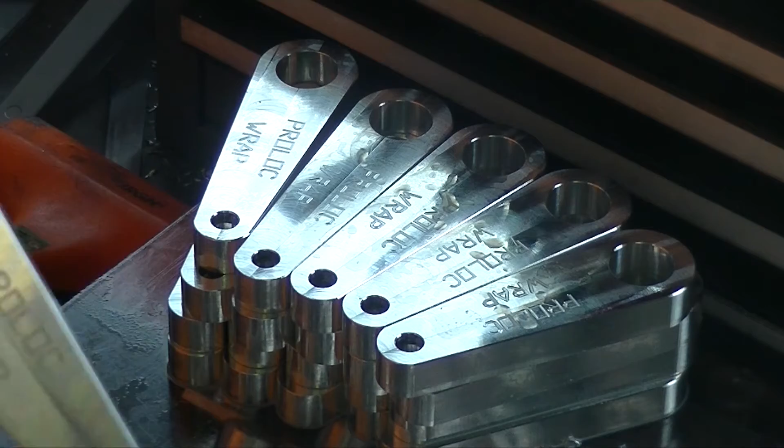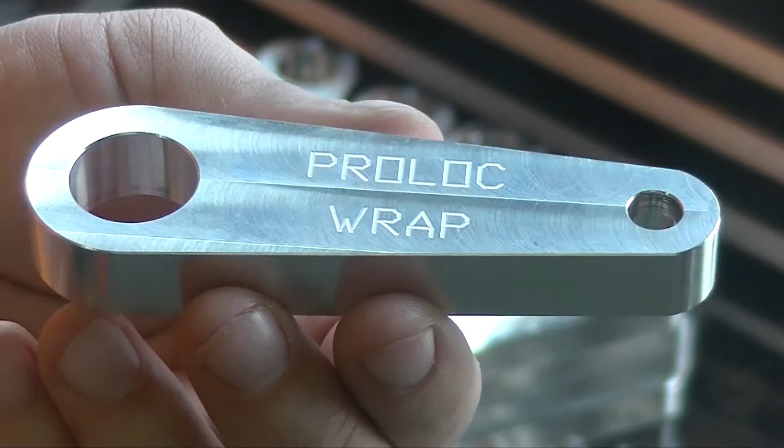This is the first operation that's held in the vise, like this. This is up. So we come in, we're using the shear hog to do the facing and the roughing. We come in with a 3/8 Imco end mill and clean up the pockets here, at which point we flip it over, put it into the soft jaws, and deck the excess material off with the same shear hog. We drill our hole in here, we do our engraving, and then we finish this up with some chamfers.

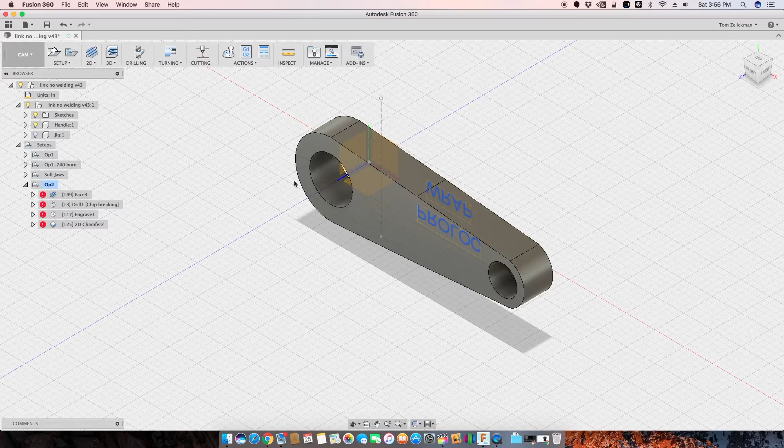Alright, so let's take a look at our speeds and feeds and all that good stuff, because I've had a few people ask about this and I want to make sure I'm covering everything. So we've got the handle, which is pretty straightforward. We've got a counterbore hole here, and then we flip it over and we've got the other work to do, clean up and then engraving. So op 1, let's take a look at op 1.

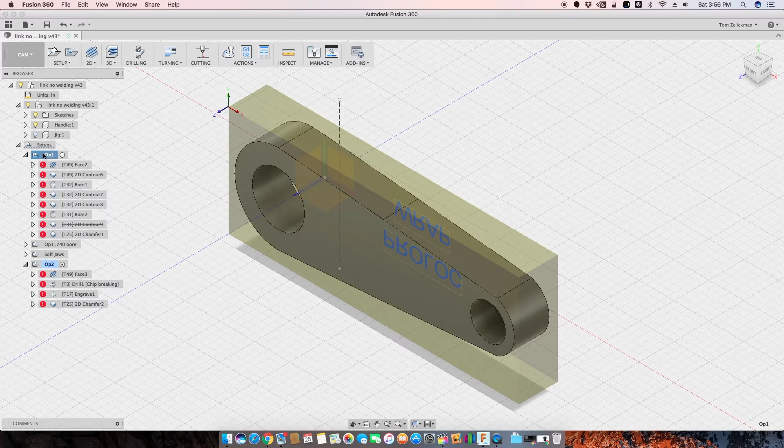This is operation 1. In the vise, come in here, facing operation, I'm using the shear hog, and actually this one should be suppressed as well. So basically I try to do it by tool. The shear hog comes in and does facing, and then we do some contouring and my roughing. So let's take a look.

The shear hog here, we're running at 10,000 RPMs. For a facing operation, it wasn't taking a whole lot off. When I set up my model here, I only did a 10 thou offset from top. The shear hog actually gives surprisingly good floor surface, so whenever you're seeing the faced pieces on here, that's coming from the shear hog.

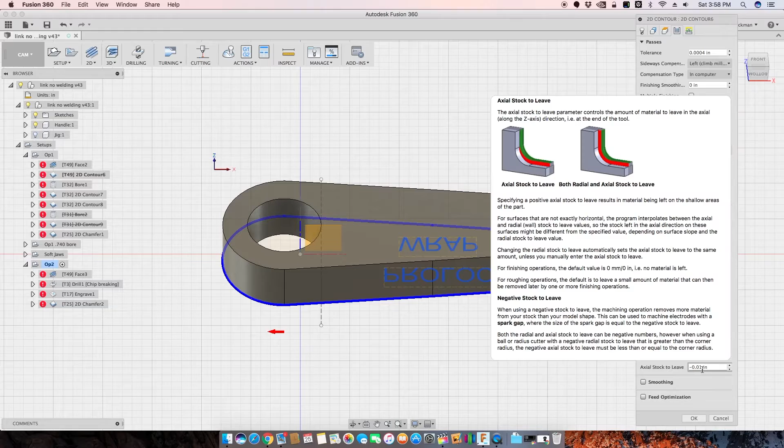Let's look at the 2D contour, because this one is pretty important. Actually, I need to change this because I thought I changed this already. Interesting. So we're doing multiple depths, 0.1. That's fine. Stock to leave: I left 10 thou on the sidewall, and I went 10 thou below, so I went to 0.510 as a full depth here, doing 100 thou per step down.

Let's go back to our feeds and speeds. I brought that down to 4 thou per tooth. It's a single flute cutter. Lead in actually should be the same as the cutting feed. Not sure why, I thought I had changed that. And then ramping, that's probably not a big deal. Pretty straightforward. Again, 10,000 RPM. You could probably do 8,500; the 10,000 was a little overkill sometimes.

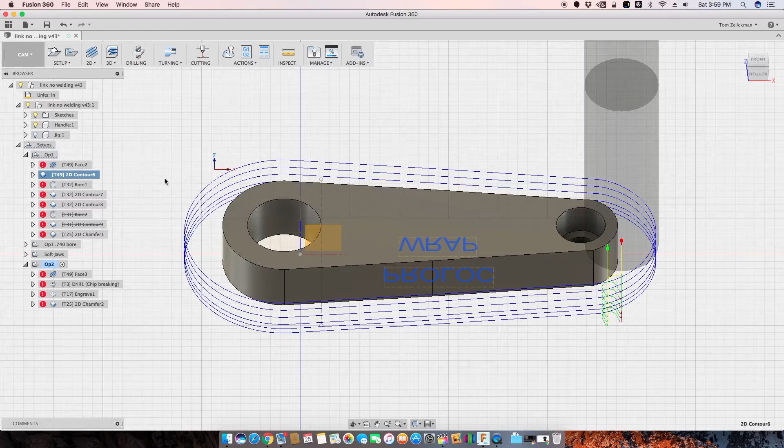Sometimes I run this on full kill instead of stun, and you can see I got phenomenal material removal without pushing too hard on this one. Now you saw later on, maybe that's where I changed it, I had to make some changes to how hard I was doing my facing operation in there. For boring, I'm using an IMCO 3-flute end mill here, and it works really, really well. I don't know if I've got all the information.

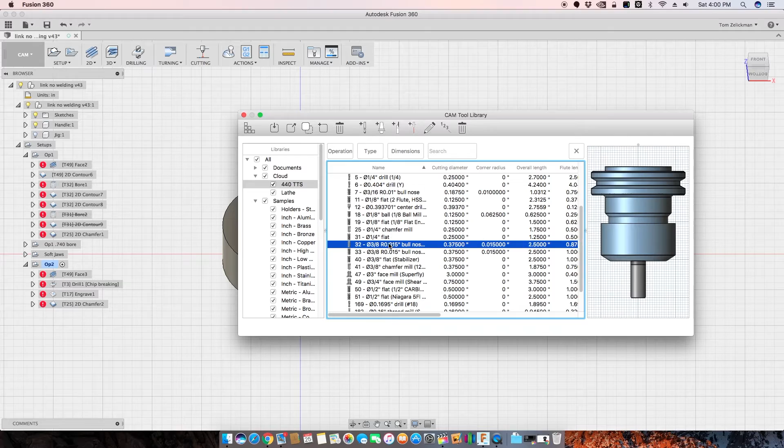Yeah, let me see if I've got it in my tool library. I don't know if I've got all of the information on that. Actually, I use a 1/4 inch and a 3/8 inch in here, and both of those are from IMCO. I don't have the full information in here, but I know what a couple of you were interested in seeing is speeds and feeds.

90 inches a minute on that one, right? 3 thou per tooth. It's blasting in. There's no problems with that. I did tell it to leave 10 thou. I'm using a bore operation on this. I told it to leave 10 thou on the sidewall for cleanup. This particular wall is very important because we're doing a press fit with those pins, and so I've got to have a really really tight tolerance here.

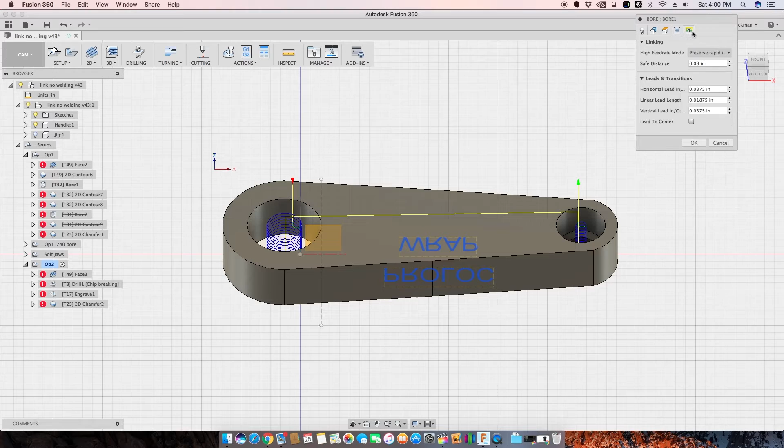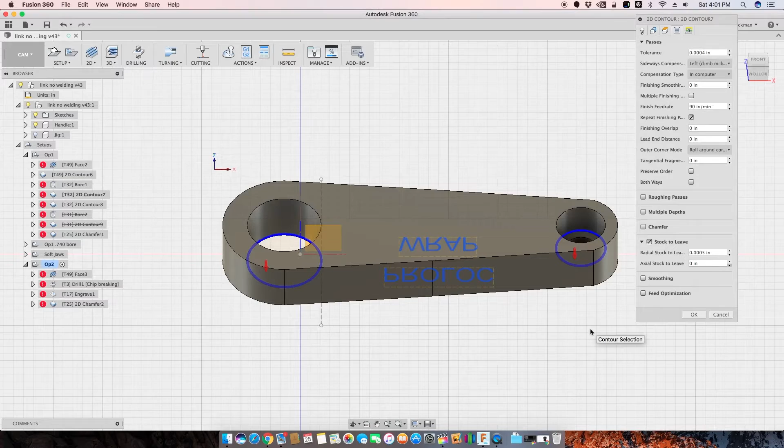One thing that I did have to do in other portions here, and it'll show up in the next one here in this contour, I had to do some specifics on the lead-in. Everything else was the same, but here, remember I told you I had to dial in and keep that really accurate? Well, I had to tell it to leave 5 tenths in order to get the bore that I needed.

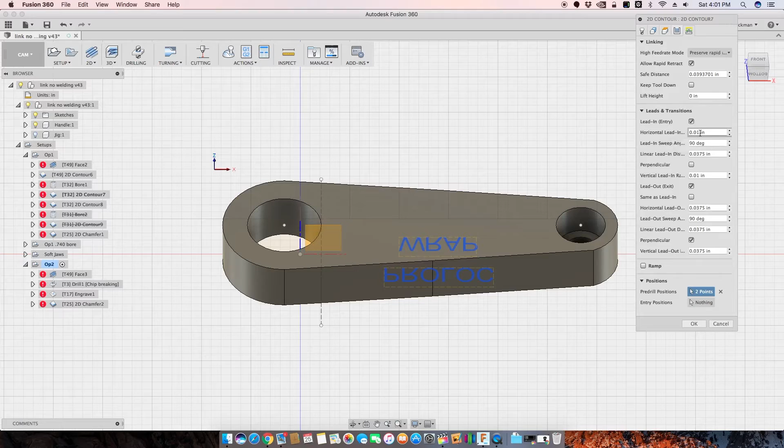And the other thing that I had to do is I had to tell it where to come in, because there's not a whole lot of space in there. I could do a ramp, but it doesn't make sense to spend all that time when everything's gone at that point. So doing that and then changing my lead in and lead out to 10 thou, just enough to get it off the wall. Let's see, what else did I do on this one?

Chamfer is pretty straightforward. This is a 1/4 inch Chamfer Mill. I think this is a Lakeshore carbide. It's a 45 degree, or I guess 90 degree included angle. Nothing spectacular here. 6,500 RPM. I was running at 25 inches a minute. I've actually run these at 8,000 and run it a little bit faster, but this seems to give really good quality on this one.

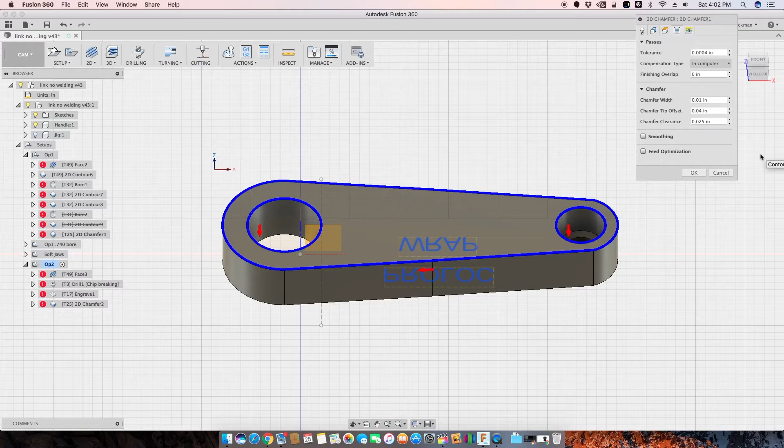One thing that you want to make sure on this is that you're doing a chamfer tip offset, right? So you don't want to cut with the very tip of the cutting tool. The default is actually 40 thousandths. I tend to move it around a little bit. So in other chamfers, you'll see I've got it at 60 thousandths. Sometimes it's at 50. I try to move it around so I'm not using the exact same part of the cutter all the time. It's not just about making sure that you've got enough velocity on the flutes, but also so that you're not just wearing out that same spot all the time.

So that was op 1, right? Not a whole lot there. Again, we clean it up, we rough it, and bring these to spec. Before I could do op 2, I had a special one where I had to do an undersize bore, so I just duplicated that, and then I changed some of my settings in this contour.

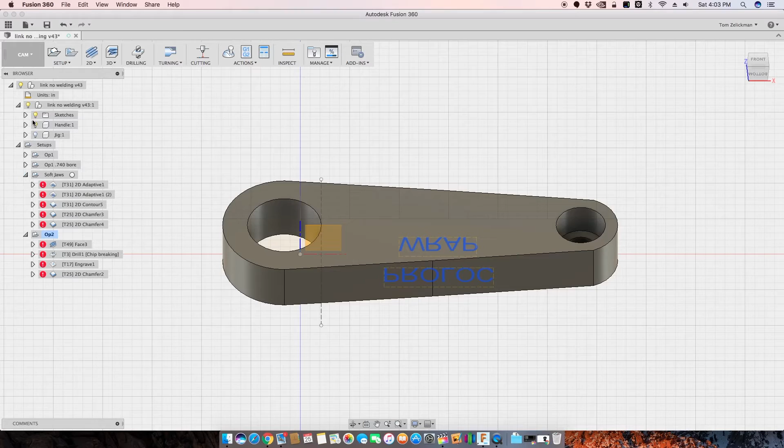So then the soft jaws. Let's turn the soft jaws on. Can't see anything right now, so let's move this around. All right, so here's our soft jaws. Pretty straightforward on making soft jaws. There's a ton of videos out there on how to make soft jaws.

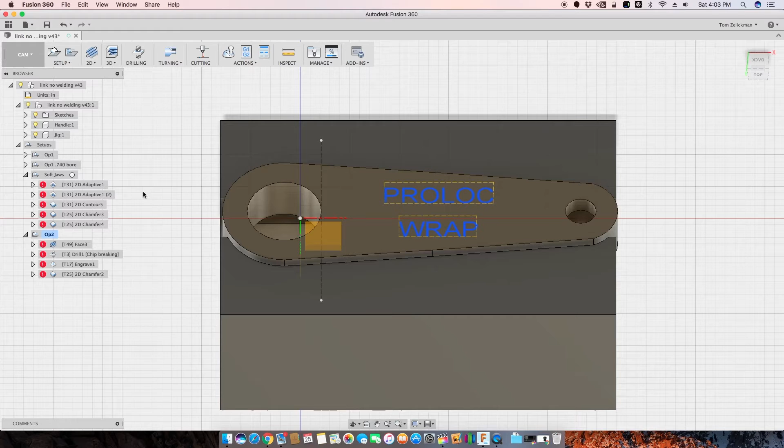So let's take a look at that. I'm going to turn the handle off for a minute. Oops, let me turn that sketch off too. And so we can see the soft jaw. One thing that I see people forget all the time is they leave sharp edges in here, because what you're really doing is you're taking this handle and you're cutting it away, right? When you make the jaws themselves, you're not actually extruding it into where the handle is. Well, that would leave these sharp edges, these sharp points.

Well, that's a good place for the tool to get off a little bit. It can get burrs or things like that. So I always just put a tiny little radius in there. It's not hard to do, right? Just put a little radius in there, and easy to take care of.

So go in and remember, you've got to have a known distance between the two sides. I used that 1/4 inch tool. Came in. Now this one, I wasn't trying to push it. It's a 1/4 inch tool. I was using some of the factory settings for this one as far as material removal rate.

But one thing in here that I wanted to point out, I typically, when I'm looking at my optimal load on the 440, let's look at the expression because I changed this quite a bit. I use tool diameter because I'm doing a full depth of cut on this one. Tool diameter times, it's basically 5%. It's not a heavy engagement, right? It's not a whole lot on there, but it comes out really well, and you can run fairly fast cutting speeds. So at that engagement, you can really cook with it.

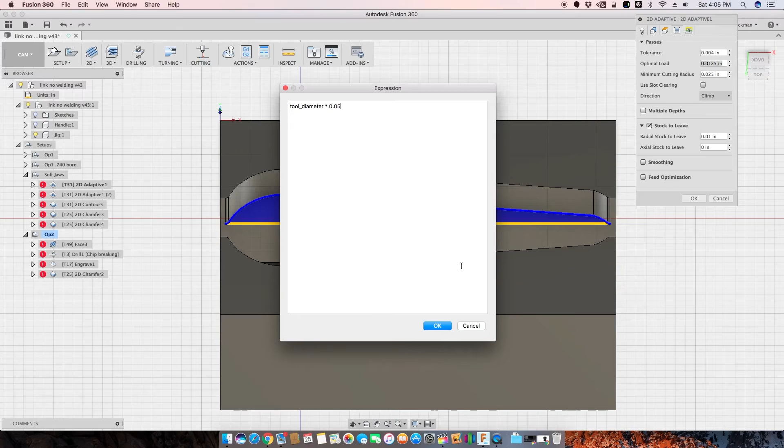And what I find is I get good material removal at a good balance there. I think I've only broken one of those. And now that I've said something, I've jinxed myself, but that's okay. And again, 10 thou on the wall, and I come back. So basically, I do each one.

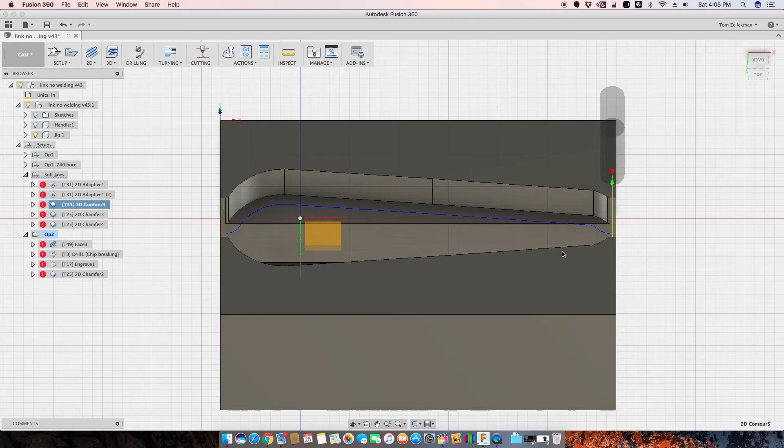Right. I did it as separate tool paths so I could restrict where it was going, and then come in, do my contours. The contours where I actually do those little radius in there, right? And then come in and do chamfers, right? Get it cleaned up. I did an upper chamfer, and then because I could, I did the lower chamfer as well. And I think this is one where I did it. Let me see. Yeah, you can see I moved the tip to 60 thou instead of 40 thou.

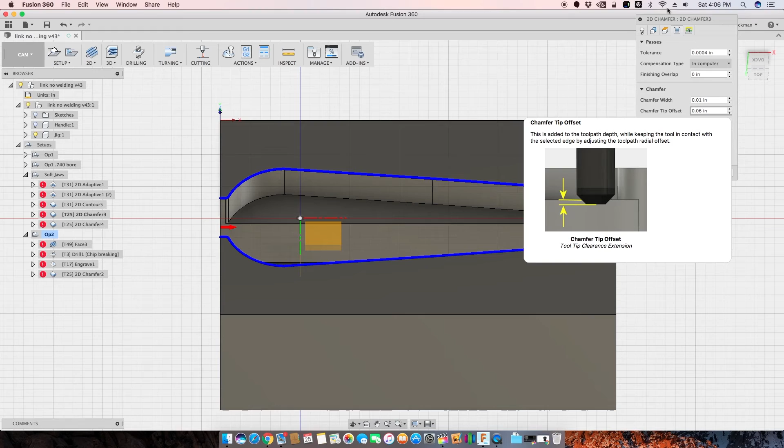All right. So we made soft jaws. We'll turn the handle back on, and now what's left to do on the handle? Well, the first thing we do is we face it. Now there is 250 thousandths of material there, right? So we need to do some real roughing.

And you notice I brought that feed rate way down on this one because, hey, at 100 thou, and this is where I was adjusting the slider in that video, but I realized at 100 thou depth of cut, full engagement like that, I needed to slow it down. I guess I was at 95%, so 95% engagement. So yeah, that one was pushing it.

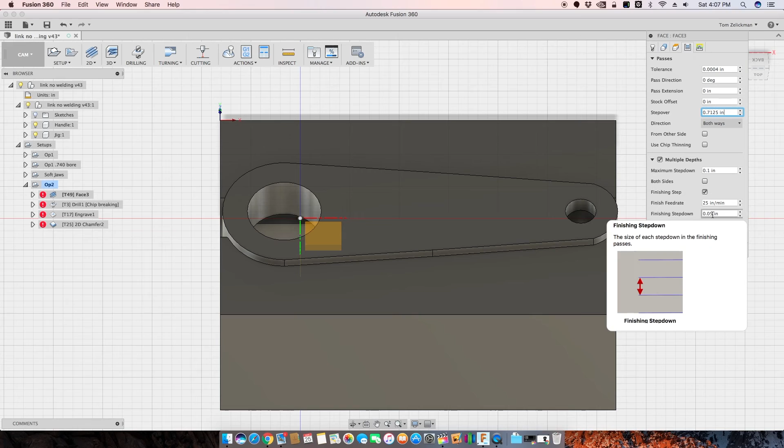But one thing that I did is I looked at how much material was left, and I wanted to make sure. So I've got 100 thou step downs, but then I did a finishing step at 50 thou, right, to make sure that I had a nice even distribution there. So when you look at that, it comes in, it does those first two, and then that last one is a 50 thou depth of cut. So half the engagement, but the same feed rate. I get great floor finish.

I think in the video I didn't show I switched from using that 1/4 inch tool to do this hole, to doing it with the drill. It was just a better way to do it. It was a whole lot faster, and it made more sense. I was drilling a hole. Why was I doing helical interpolation for a hole? So drill it. Where you can drill, do it.

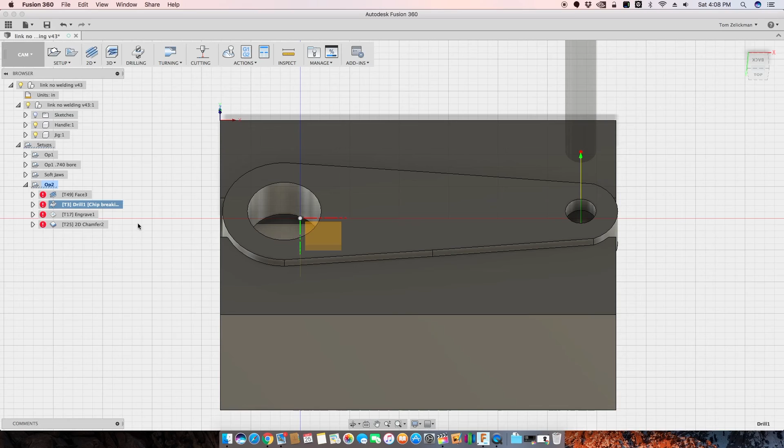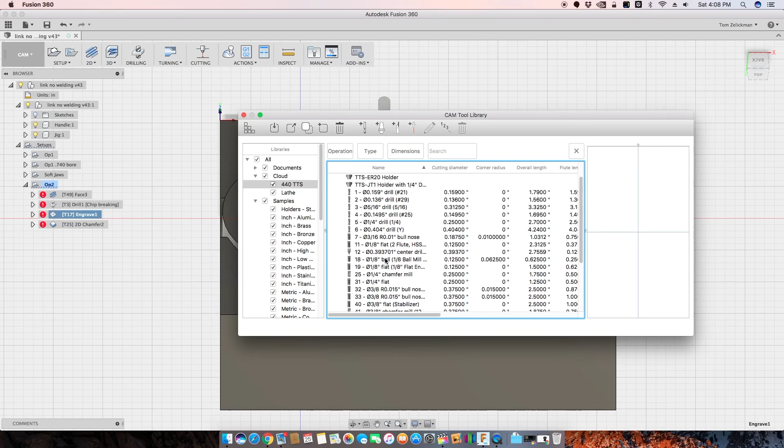Engraving. This is a neat one because I'm cheating, right? I actually created this tool. Let's take a look at my tool library. So let's look at tool 17 and 18. Where is it? Oh, neat. I don't have it on this one. It hasn't refreshed yet. All right, well, let's do it here.

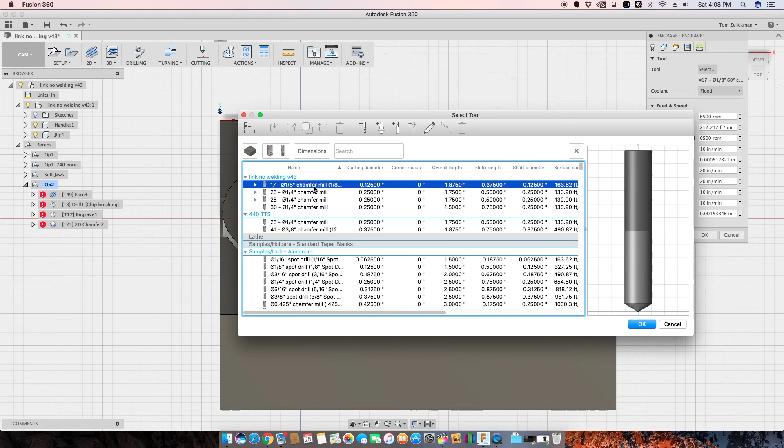All right, so what I did was I created a new tool, but I faked it out. This is actually a ball mill. It's a 3-flute ball end mill, 1/8 inch. And it's a little stubby thing. It doesn't stick out very far. I think it's 3/8 length. But I told it was a chamfer mill because what that allows me to do is run this chamfering process.

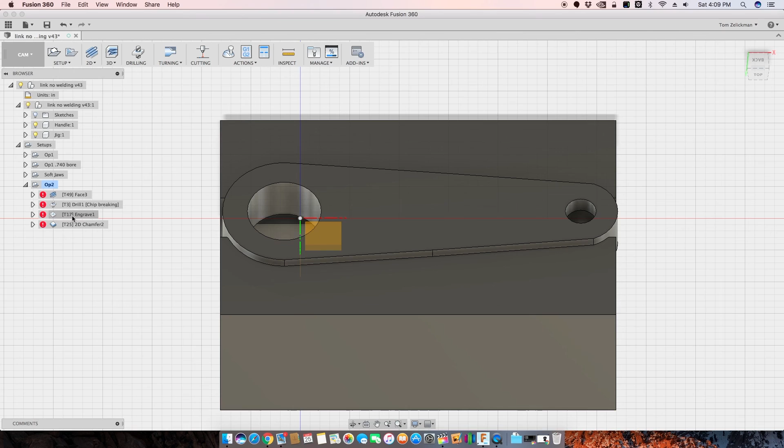And so in doing that, I was running that same 6,500 RPM. I was doing 10 inches a minute. I probably could push that faster, but it does a really nice job on this. So that is what I went with. And I left the defaults. I didn't touch anything else. With the engrave function, it handles the heights and all kinds of things. So yeah, it came in and handled that like a champ.

And then the last operation is that cleanup, right? Do the chamfer around there and get it all cleaned up. So that is the explanation of speeds and feeds, and how I got my shiny parts.

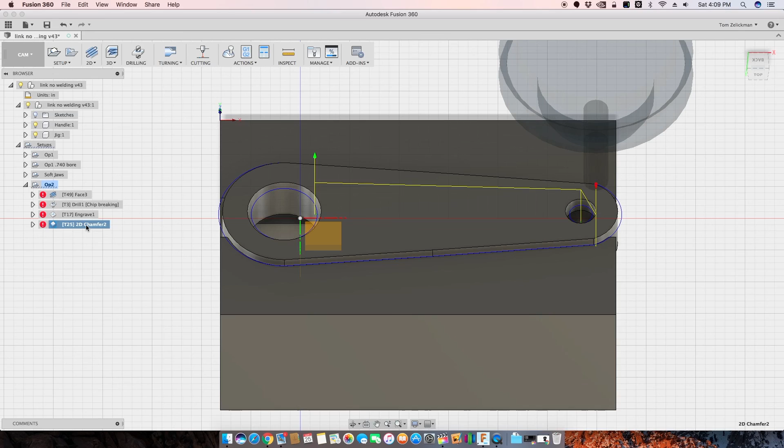Alright, so let's take a look at the CAM that we used for this video. Let's try this again.